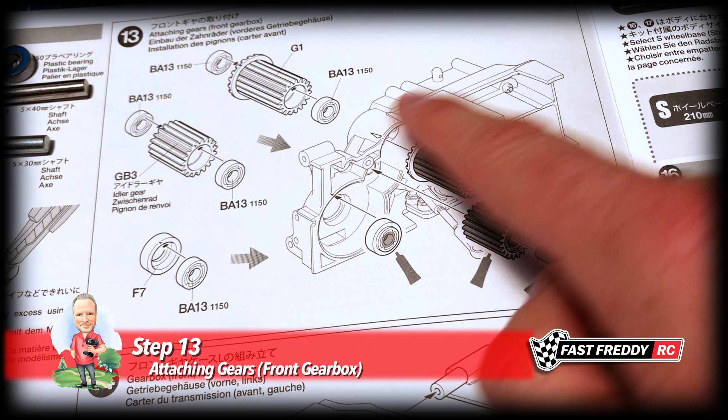So for step 13, attaching the gears for the front gearbox, we need to grab the other half of the front gearbox, along with these gears, shafts and bearings. These ball bearings are replacing the plastic bearings, and there's our shafts and the two gears. So I'll set this up and we'll put this together.

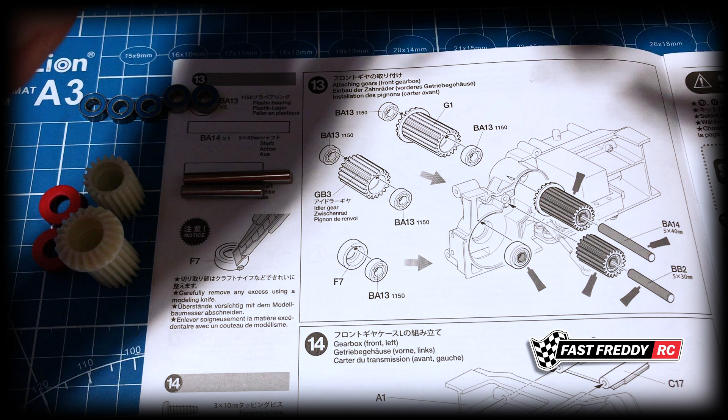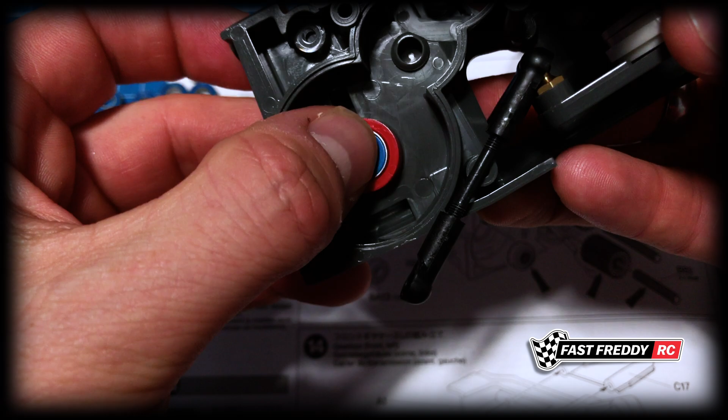It's actually the same side of the gearbox we've been working on for this step, not the other side. First off, we're going to put these ones in. You can see they want you to use this F7 piece, put the bearing inside of that, and then that entire unit fits inside that front hole. So I've got to push that whole thing in.

There we go, so that's in place. That's what it's going to look like. Interesting, I wonder if that must be all the way. Seems like it sticks out a bit, but there must be a reason.

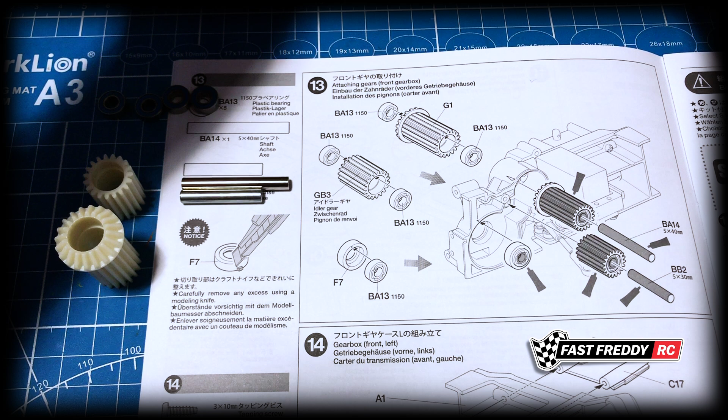And then we're going to grease up all of this. You can see there's the two gears, so I think we'll stick with this one first, and it shows you greasing everything up.

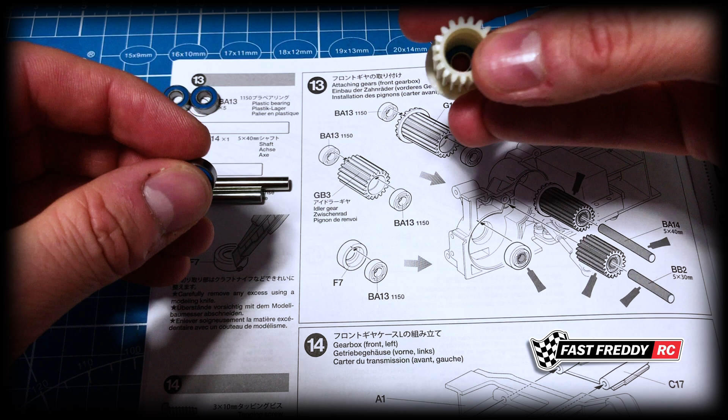But I'm going to put a bearing in there. If I can get that one to sit properly, yes. And there's going to be a bearing on this side, just like that. And then with this one, same thing - there's a bearing on this side and a bearing on that side. So all the bearings are in.

Now we've got to put this in place and grease this up. I think we'll grease this side up first. So let's do that.

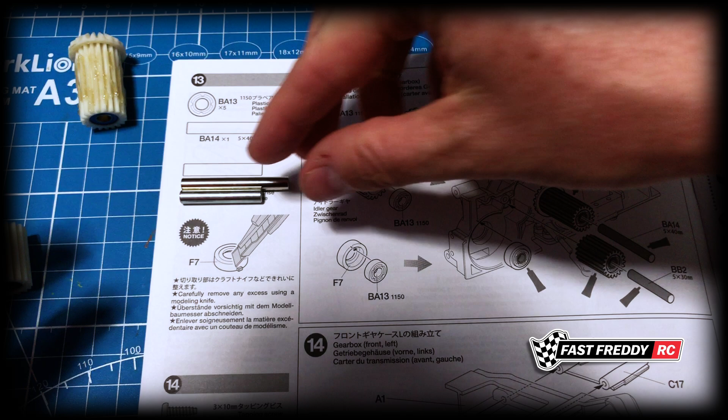You can see we're using the BA14, which is the larger shaft, and it's showing greasing that up. Now typically, because I'm using bearings, I don't tend to grease the shaft. But because this is inside the gearbox, there's not going to be a lot of grime and dirt, so I think I'm going to grease it because it might add a little extra protection and keep these gears moving smooth. Now I've got to wipe my hands down.

You can see that this one needs to fit down here in that hole. So I'm going to grab that and slide it in down there. That's how that's going to sit right there. And then we're going to do the very same thing with this other one.

And of course we've got the smaller shaft now, same thing - I'm going to grease this up too. I'm not putting a lot on, but I am going to put some.

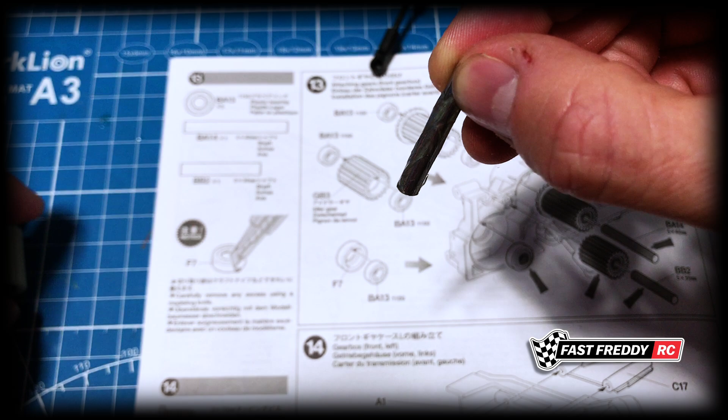And with this, we're going to slide that through there, just like that. They're showing that they want you to grease this up right away, so let's do that. All right, I got enough on there.

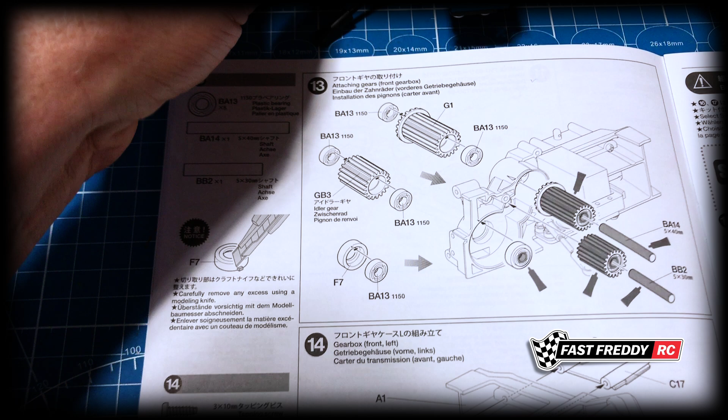And now that is going to slide into this hole right here. So we'll just move that into place, and there we go - there are those two gears in place. I'll just wipe my hands down.

So ultimately, that is what the step is - getting those two gears in place and getting the bearing for that main drive unit for the differential. So step 13 is complete.

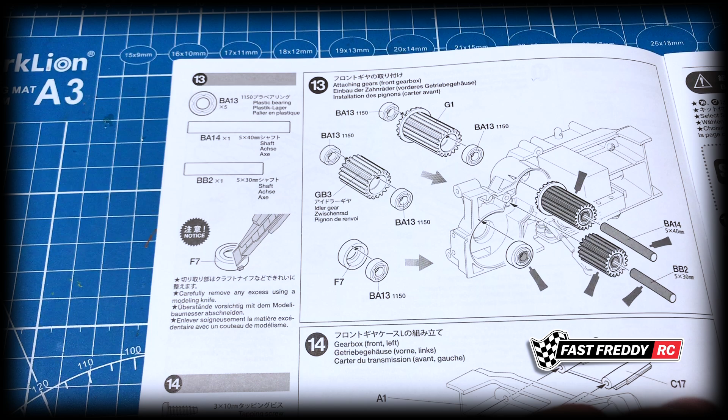So we can now move on to step 14, and we're going to work on the left side of the gearbox - the front left gearbox.

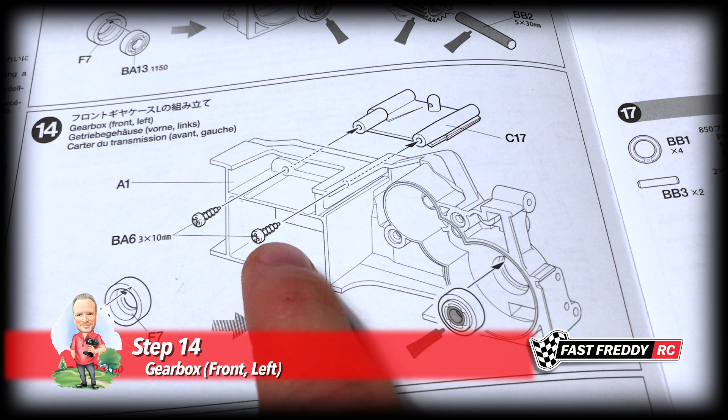We're going to need to put on this piece right here, which is, I'm sure, part of the battery door, as we did with the other side. And then we've got to put the other bearing and housing in, which looks like that, into the front end. You can see they're showing it being put together there. So there's really only those two steps - that piece, and of course the other side of our gearbox and our hardware.

So I'll set this up and put it together. I think what we'll do is get this piece right here into that top part of the chassis first. So if we turn this around, this is going to sit right there, very similar to what we did with the other side. We just need to get one of the screws into the holes here.

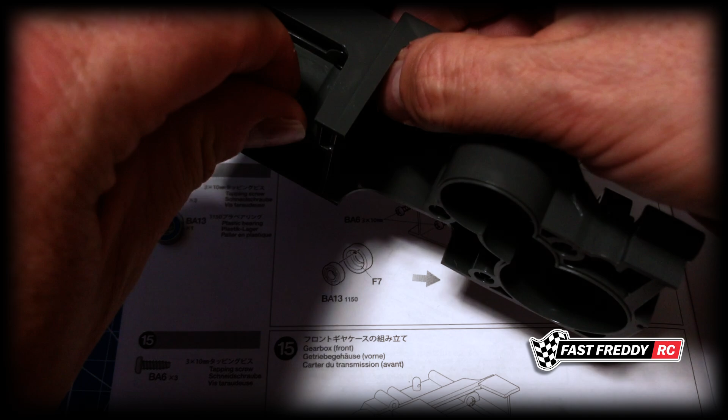So let's see if we can do it this way. There we go, screw that in. And same thing again on that side. There we go.

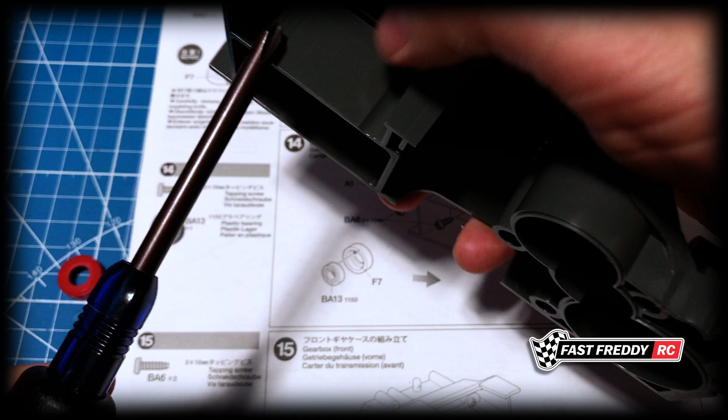These screws are tapping screws, but this piece here is the softer plastic, so when you get to the end, stop. Don't over tighten, because you could end up stripping it out if you put too much pressure on the screwdriver. Now I'm just going back and forth making sure that it actually is in, and it is. Perfect, so that part is done.

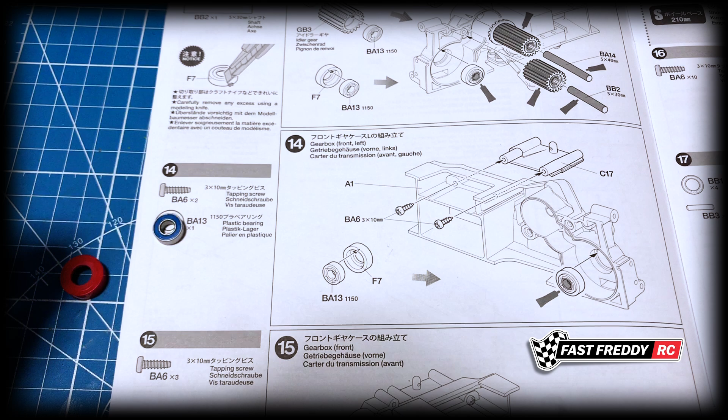Now what we need to do is put a bearing into here, pop this into this F7 piece, which pretty much is all the way down. It's interesting how it sticks out, see how it's just a little bit out there. And then we're going to take this, and it's going to sit this way into the housing, just like that. So push that, you heard the snap, so it's in place.

Now, because these are accessible from the outside, I am not going to grease these ones. I just don't want to do that. So I don't mind when it's internal, but these two bearings are going to be exposed to the elements, so that I'm not going to do.

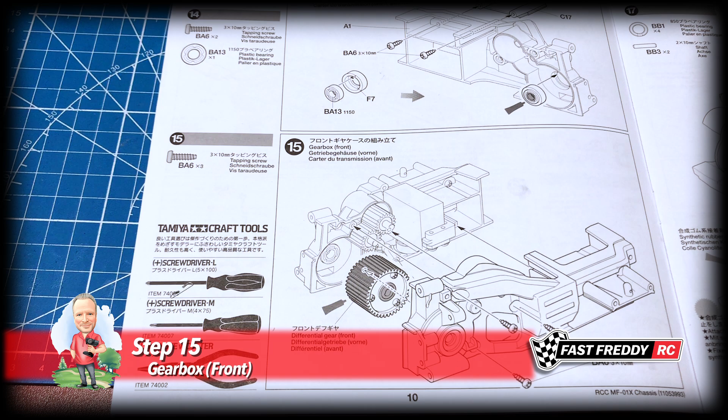So there we go, there is step 14. That means we can move on to step 15, and that means we're going to close the gearbox and put in the differential. So right away, let's get the differential in place.

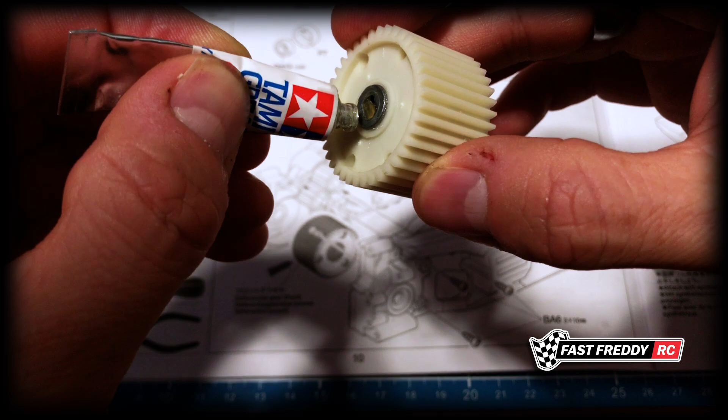And you can see that they want you to grease this, because you can see how it's dark. We're going to grease this up, and we're going to grease the other side. There we go, and we've got to grease the entire gear. So let's do that, we're going to grease this up all the way.

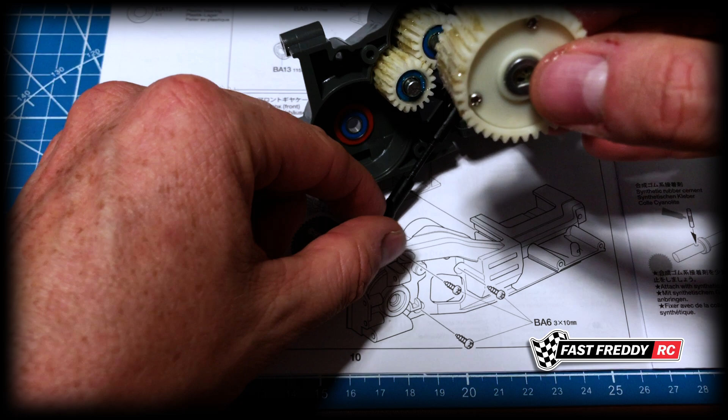Now it's a tough one. I do believe that a gearbox should have plenty of grease. If you've only got these two tubes and that's all you want to, you're not going to buy any extra, it's a tough call as to how much grease you end up putting on these. Now I think we've got enough on this now, and of course it's going to blend in with the grease from the other gears that we already greased up, these ones. So you may have to just sort of decide for yourself how you want to do this.

Now I am going to take this and put this into place, and you can see that the screws are facing out, so that's how I'm going to do it. Now I'm just going to put this aside. Hopefully nothing falls out while I just get my hands cleaned again.

And now with that sitting there, we need to put on the other half, and this should come together nicely. Let's see, if we take that, that's got to sit right over top of that. But you've also got to see the lip that's there, that's also got to come together.

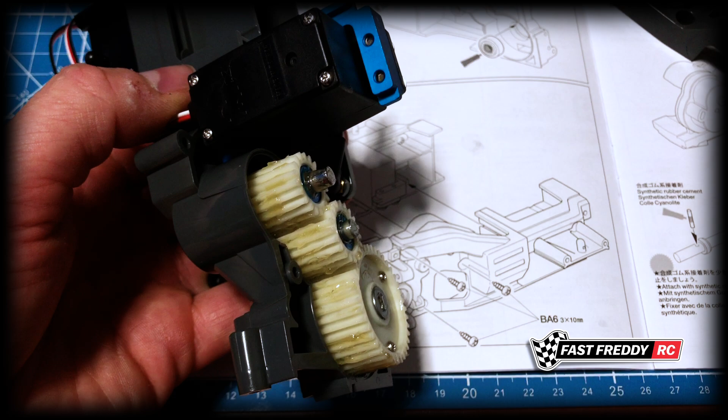I wonder if I can hold it this way for you, so you can see that that's going to have to slide into the holes that are on this side, just like the other. So that's got to slide into there, as you can see on the top, just like that right here. That's got to slide that way, and then hopefully everything else will come together.

Except we've got one missing thing. That has to still slide through the hole, remember that. So that's still got to fit through the hole on that side, and then everything else should come together nicely. There we go. Mostly.

Now, something is binding still. So what is it? Something... Aha, there we go. Now it's popped into place.

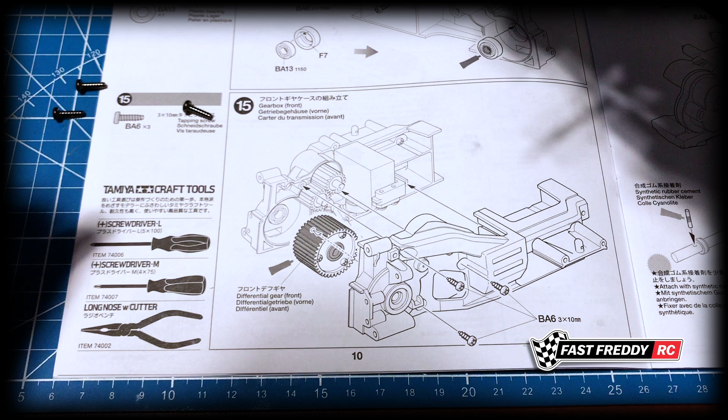Excellent, so now we've got the 3 screws. So there's 1 screw right there. I'm just going to screw it in a little way, just so that I've got something held. We've got 1 screw right here. Again, I'm going to screw this in, but not all the way. And then we've got this screw right here, which has to go into there.

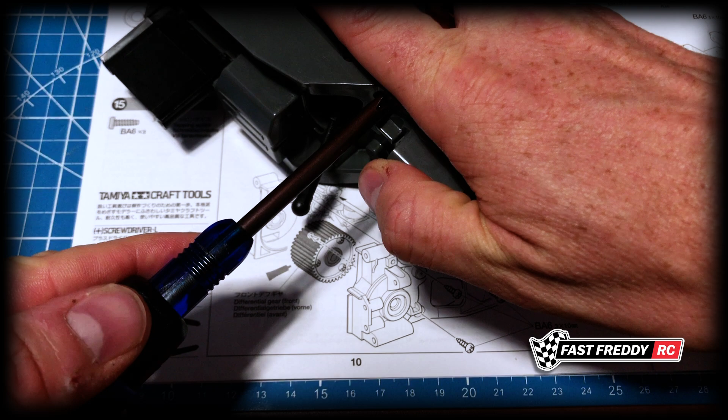Now these ones, since you're going from hard plastic and you've got the tapping screw, you should be able to go all the way, and when you get to the end, you're going to know you're at the end. Yep, I'll do one last check on that one. Yep, and this shifted when I was trying to put that in, so I'll turn it the other way, hopefully. Pretty close, so there we go. There is step 15 complete.